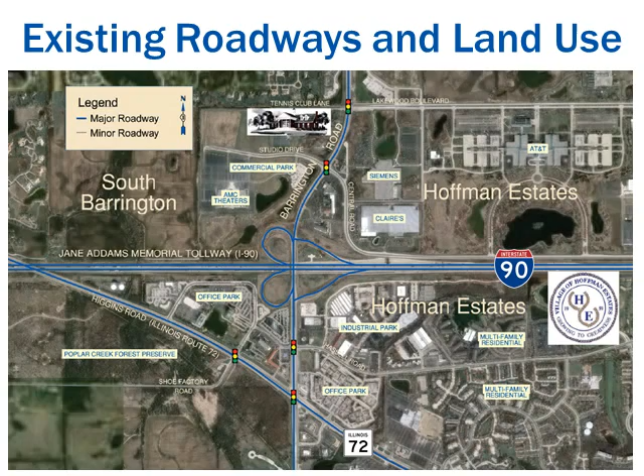Roadway projects are typically implemented in 3 phases. Phase 1 includes preliminary engineering and environmental studies. Phase 2 includes contract plan preparation and land acquisition. Phase 3 is the construction phase, which is the most visible to the public. This project is currently nearing completion of Phase 1. This interchange project has been scheduled to be constructed in conjunction with the Illinois Tollway's Jane Addams Memorial Tollway Rebuild and Widen project. The proposed schedule will reduce the overall duration of construction in the area, expedite opportunities for economic development, and potentially save on construction costs.

The Project Study Group, often referred to as the PSG, for this project includes primary stakeholders, the Village of Hoffman Estates, the Illinois Tollway, and the Illinois Department of Transportation. The Federal Highway Administration ensures the requirements are met to qualify for federal funding. The Community Advisory Group, often referred to as the CAG, is comprised of entities directly affected by the study. The CAG provided insight to issues and concerns and identified potential solutions. The CAG has met in workshop format several times throughout the Phase 1 study.

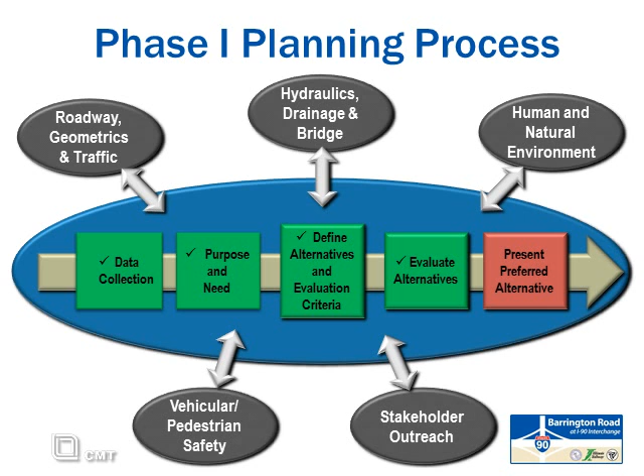The purpose and need of the project was developed jointly by the PSG and the CAG. The purpose of the proposed improvement is to provide full accessibility and connectivity to, from, and across the I-90 Jane Addams Memorial Tollway, and to provide safe mobility for multimodal users crossing I-90 and Barrington Road in the vicinity of the interchange. The project's needs are based upon operational deficiencies, long emergency response and transport times, and the lack of safe bicycle and pedestrian connectivity across I-90.

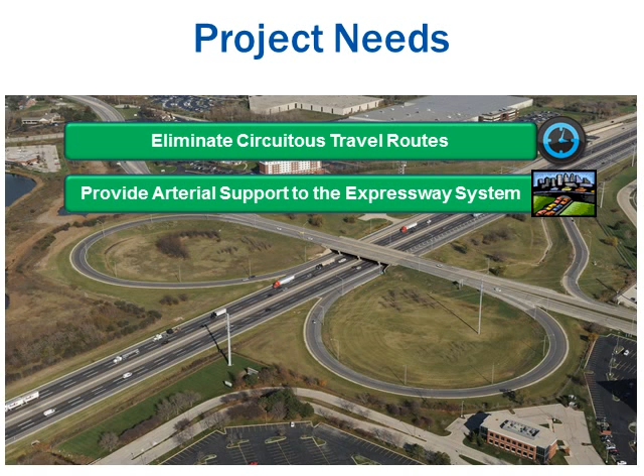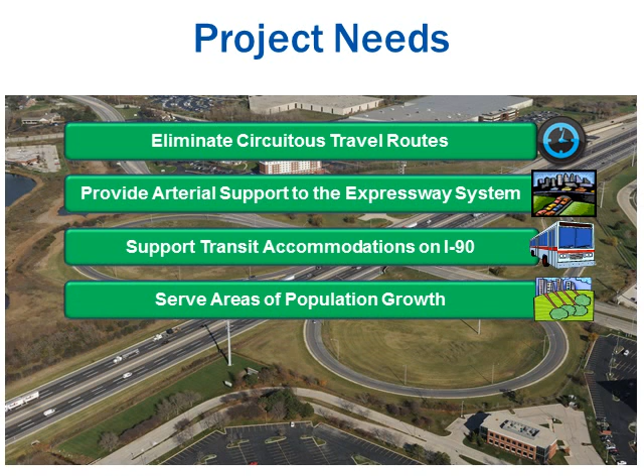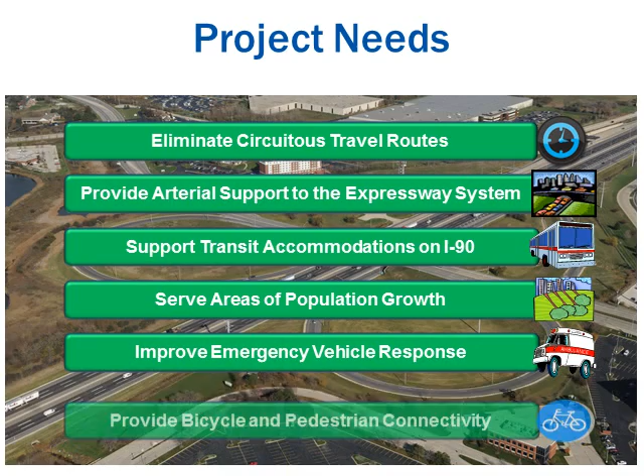In further detail, the existing limited interchange access presents the following operational issues. The partial access creates circuitous travel routes for motorists. The partial access limits the connectivity to the expressway system, which diminishes the ability of the arterial to support the expressway system. The partial access restricts accommodations for transit on I-90, and the limited access constrains the ability to serve areas of population growth. As stated previously, the partial access also results in long emergency response and transport times. Finally, the existing interchange lacks safe bicycle and pedestrian connectivity across I-90.

Following the development of the purpose and need was the alternatives analysis. As part of the alternatives analysis, the evaluation and screening process included 4 steps to generate a preferred alternative. The first step was to develop alternatives. The PSG developed interchange alternatives based upon their technical expertise and past experience. Alternatives were also developed by the CAG. The alternatives then went through the fatal flaw screening and the purpose and need screening to narrow the range of possible alternatives to be approved for construction. The final step of the evaluation and screening process was the alternatives evaluation, which was presented at the last public meeting. The PSG and CAG have selected and refined a preferred alternative for your review this evening.

The second public information meeting was held on February 21, 2013. 3 alternatives were presented, and one of the alternatives was identified as the draft preferred alternative by the Project Study Group and Community Advisory Group. The majority of comments expressed support of the preferred alternative.

The eastbound exit from I-90 is located in the southwest corner of where I-90 and Barrington Road intersect. The eastbound entrance to I-90 is located in the southeast quadrant of the interchange. The westbound exit from I-90 is located in the northeast corner of the interchange, and the westbound entrance is located at the northwest corner of the interchange. A simulation of the interchange operations is provided in the next room to show the operations of this type of interchange.

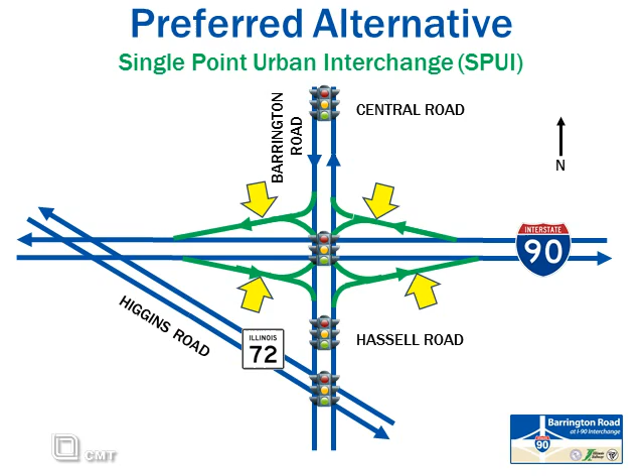Transportation improvements planned within the project study area included not only the Illinois Tollway's Jane Addams Memorial Tollway Rebuild and Widen project, but also Pace Bus's I-90 Market Expansion project, of which a park and ride was planned in the vicinity of Barrington Road. Pace's project includes an express bus operating on I-90 and stopping at various locations along the corridor to pick up and drop off passengers.

Pace participated in the Community Advisory Group and worked with the Project Study Group to develop complementary transit improvements to the proposed interchange design. Pace has identified a preferred transit improvement concept that they will develop further in cooperation with the Illinois Tollway and the Village of Hoffman Estates. Should Metra's fixed rail Star Line improvement be implemented, it would replace the Pace Express bus operation on I-90. The proposed bridge does not preclude implementation of the Star Line.

The Pace Park and Ride concept at Barrington Road includes passenger vehicles accessing the facility via Central Road. Leaving the car in the parking lot, pedestrians can access a pedestrian overpass of the eastern ramp and I-90 mainline. An eastbound station is located between the eastbound I-90 mainline and the eastbound entrance ramp. An eastbound express bus, traveling on I-90 mainline with traffic, exits at the eastbound exit ramp.

Instead of continuing up the interchange ramp with vehicles to the intersection, the express bus diverges from ramp traffic to its own ramp adjacent to the I-90 mainline, separated by a barrier wall. The express bus goes underneath the Barrington Road Bridge, similar to the mainline traffic. The express bus continues on the bus ramp to the station for passenger pickup or drop-off. The express bus then exits the station and continues on the bus ramp to converge with the eastbound entrance ramp, which then merges onto the I-90 mainline.

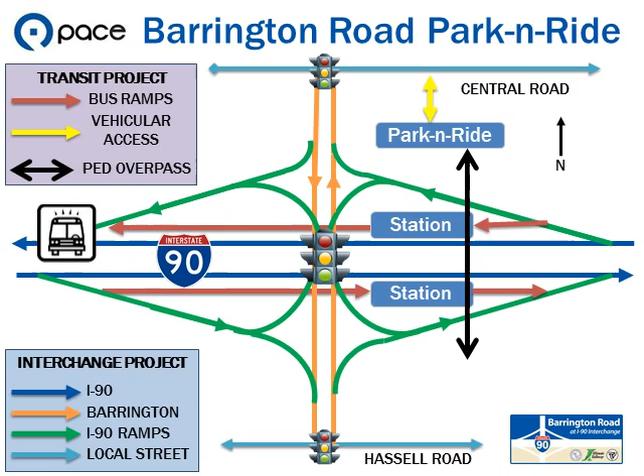The same operation applies to westbound, except the station is located between the westbound I-90 mainline and the westbound exit ramp. Westbound express bus exits I-90 mainline with traffic onto the westbound exit ramp. Before going up to the intersection, the express bus diverges from ramp traffic to its own bus ramp adjacent to the I-90 mainline, separated by a barrier wall. The express bus enters the station for passenger pickup and drop-off. The express bus then re-enters the bus ramp and goes underneath Barrington Road Bridge, similar to the mainline traffic. The express bus converges with the westbound entrance ramp, which then merges onto the I-90 mainline.

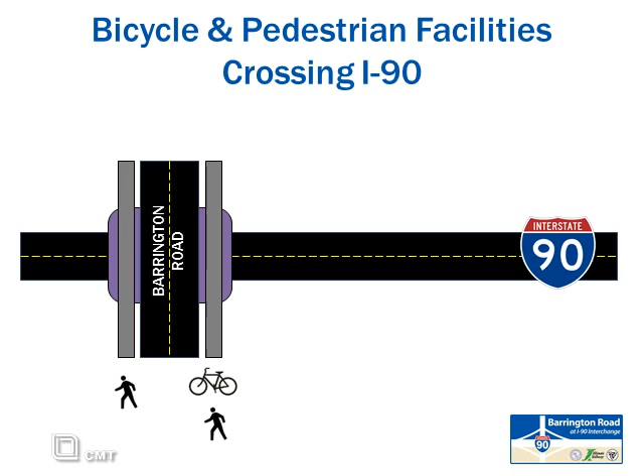One of the concerns identified by the community was the lack of connectivity for pedestrians and bicyclists across I-90. This project will include 2 crossings of I-90 for these modes of transportation. A sidewalk will be constructed on the west side of Barrington Road from Hassell Road to Central Road. A shared-use path will be constructed on the east side of Barrington Road from Hassell Road to Central Road due to the proximity of the proposed transit improvements. Both the sidewalk and the shared-use path will be carried over I-90 on the same bridge that carries Barrington Road. In addition, Pace may construct a separate pedestrian overpass approximately 600 feet east of Barrington Road as part of the proposed Barrington Road Park and Ride.

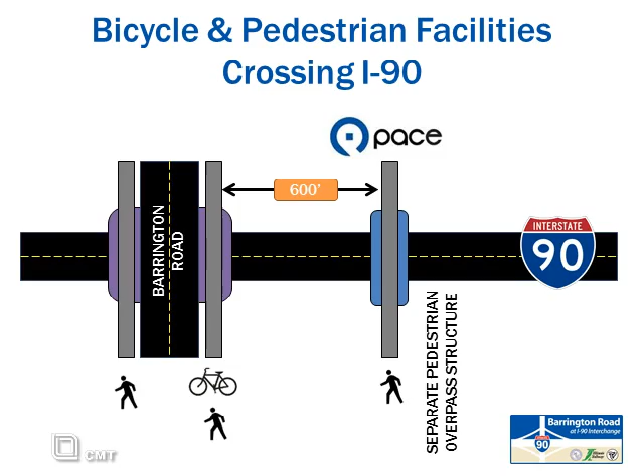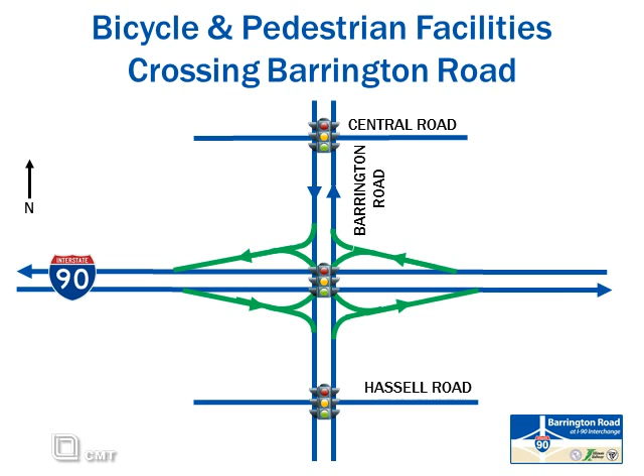Another concern identified by the community was the crossing of Barrington Road. 4 crossings of Barrington Road are proposed as part of the improvements, with 2 of them at Hassell Road and another 2 at Central Road. There will be no crosswalks across Barrington Road at the signalized intersection of the interchange on top of the bridge, only across the I-90 ramps.

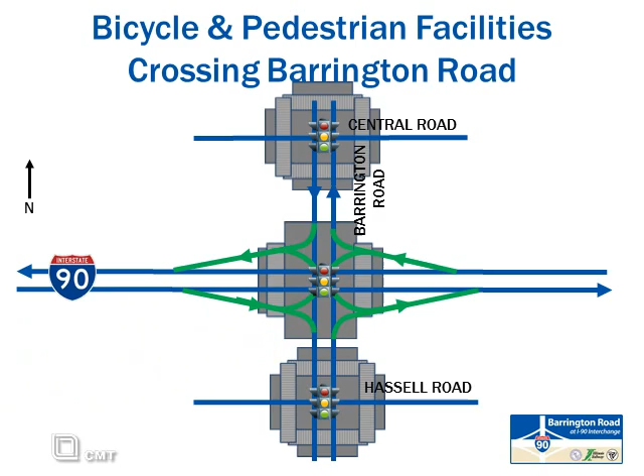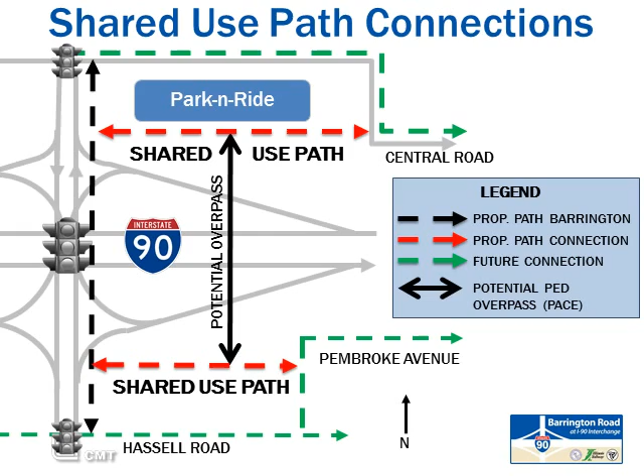In addition to bicycle and pedestrian facilities along Barrington Road, the village has proposed shared-use path connections across existing tollway right-of-way at the northeast and southeast quadrants of the interchange, which will connect the village's path system to the Barrington Road Park and Ride.

The proposed improvements for this project include property impacts. The reasons for the property impacts include limited existing right-of-way, new interchange ramps, Barrington Road widening, expanded bicycle and pedestrian facilities, and retaining wall construction and maintenance.

There are 3 types of land acquisition including fee simple, permanent easement, and temporary easement. A fee simple right-of-way acquisition includes the acquisition of all rights and interests on the property. With a permanent easement, the ownership is retained by the property owner, but the agency is allowed access for perpetual use. With a temporary easement, ownership is retained by the property owner and the land is only temporarily used during construction.

Approximately 3.46 acres of fee simple right-of-way acquisition is proposed, primarily located in the northwest quadrant of the interchange. Approximately 3 acres of permanent easement is proposed, primarily located on the utility corridor on the south side of the tollway. Approximately 3.48 acres of temporary easement is proposed and is located throughout the project limits. No land acquisition is proposed along Higgins Road. More information is provided on land acquisition in the next room.

2 public meetings and 5 community advisory group meetings have been held to date. Today's public hearing is the final scheduled public involvement activity for the project study. The project website will continue to be updated as the project enters the design and construction phases.

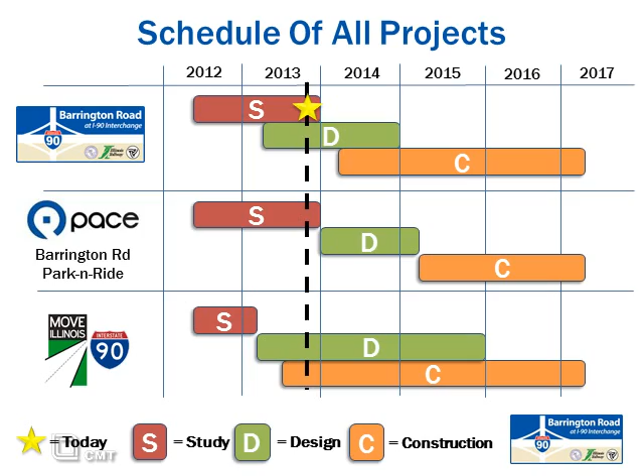The remaining steps in the study are to review tonight's public hearing comments and consider design changes. The project report will then be finalized and design approval will be obtained. At that point, the study is then complete. The land acquisition process is scheduled to begin soon. The Barrington Road Bridge reconstruction is scheduled to begin in the spring of 2014. Starting this winter, work on the contract documents for Barrington Road and the interchange will begin.

The construction stage of the project will begin in spring of 2014 with the Barrington Road Bridge replacement. The bridge is scheduled to be completed in the summer of 2015. Another construction stage of the project will begin in the spring of 2015 with the construction of the interchange and Barrington Road improvements. These improvements are scheduled to be open to traffic at the end of 2016 with completion of construction activities in early 2017.

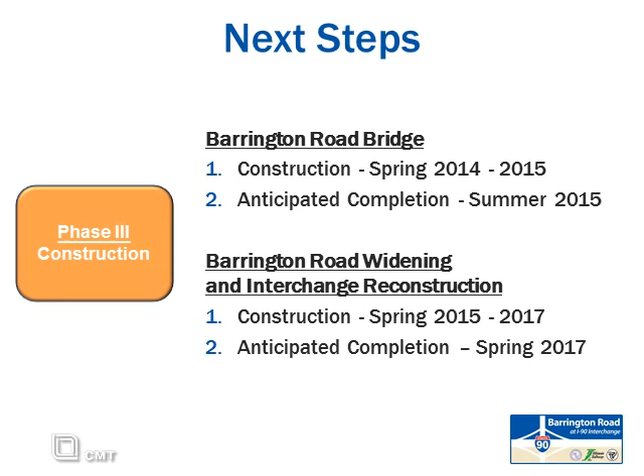Please join us in the adjoining rooms to view exhibits and information, talk with project study group members, provide verbal comments to the court reporter, or provide written comments.